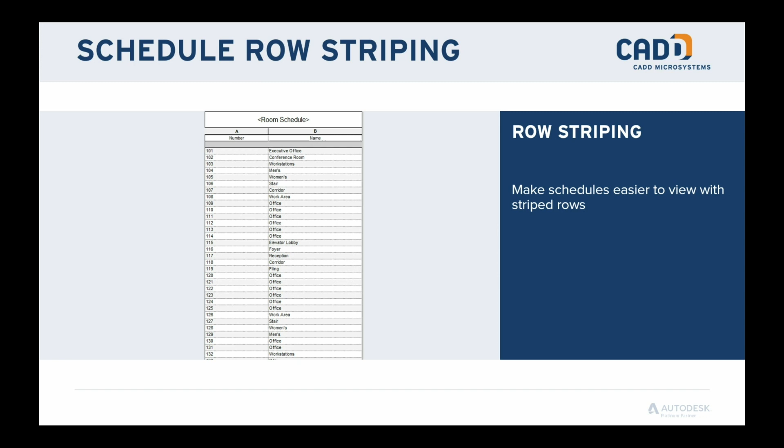But if anyone, yes? Sorry? Not that I know. Well, yes. No, actually, no, it doesn't. I'm sorry. No, it doesn't. I was thinking of printing it as a screenshot, definitely, but not putting it on the sheet. Yeah. So that's a good question. But as far as just visualizing the schedule, I think it helps a little bit, and it lets you know they're thinking about visualizing. This actually came from an idea from a Revit user, believe it or not. So they incorporated it. They said, why not?

All right. So now we're on to the MEP portion. This is the MEP analytical model updates, specifically for my mechanical guys. So has anyone ever worked with Revit Insight? No? Revit Insight is a way you can create an analytical model based on your Revit model. Then you can change around the design aspects, place equipment, and model it accordingly. But the problem was you were creating a redundant model. This is something separate from Revit.

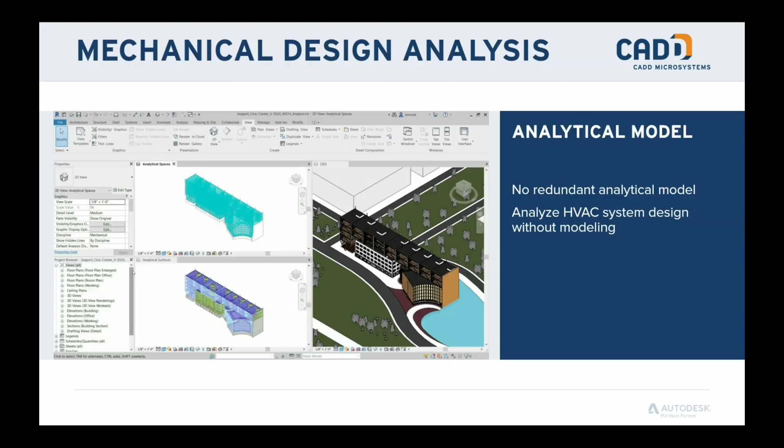Now what they did in 20.1 is give you that analytical capability inside Revit. So it's analytical modeling inside Revit, and there's no redundant analytical model. You can analyze HVAC system design without any sort of HVAC modeling. You don't have to put in a VAV. You don't have to put in ductwork. You just specify inside the room what you're looking for as far as equipment goes. Again, this removes the redundant analytical model you might be using right now and puts it into Revit. Also keep in mind this is actually done in the architectural model. Does anyone think they know why?

Because all your wall materials are in there. Okay, so all your wall materials, your space information, or room occupancy information is all in there as well. And it's also keeping track of any sort of climate changes as far as location goes. So it's taking that information and helping you build that analytical model.

So this is actually done in the architectural model, okay? So setup, architectural model, energy settings. You can go right through project settings and go right up to energy settings. Something that I've noticed here as well is that you want to say use building elements, okay? Use building elements. If you use conceptual masses, if there are no conceptual masses in there, well, it's not going to produce a model for you. So you could say use building elements.

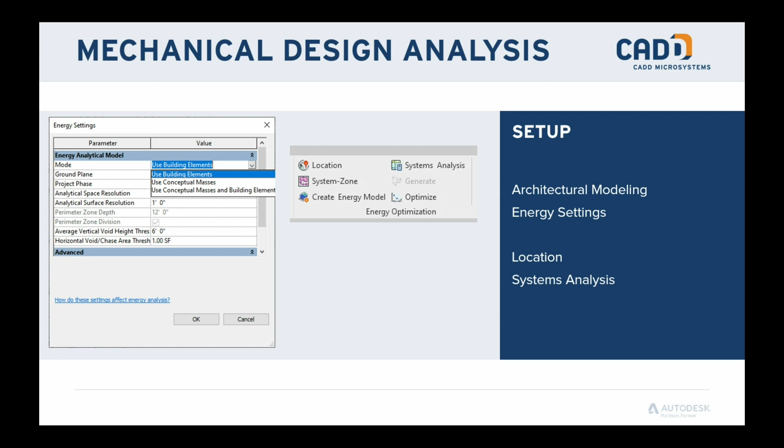You could say use both, but I've found that the best output that I've gotten was just actually using the modeling elements. So it's going to get the information from location, and also you'll find everything that you need to produce this analytical model up in the Systems Analysis tab. All right? So system creation.

So something to kind of understand here is that before you start producing your analytical model, you have to set up your systems. Okay, so you have to really just define what kind of systems you're going to be creating. So you can create an air system, a water loop system, zone equipment, and all this is done in the system browser. Okay, so when you open up the system browser, there's that little drop down. Just drop it down to analytical systems, and then you got those three tabs right there. So you can start creating your analytical settings right there.

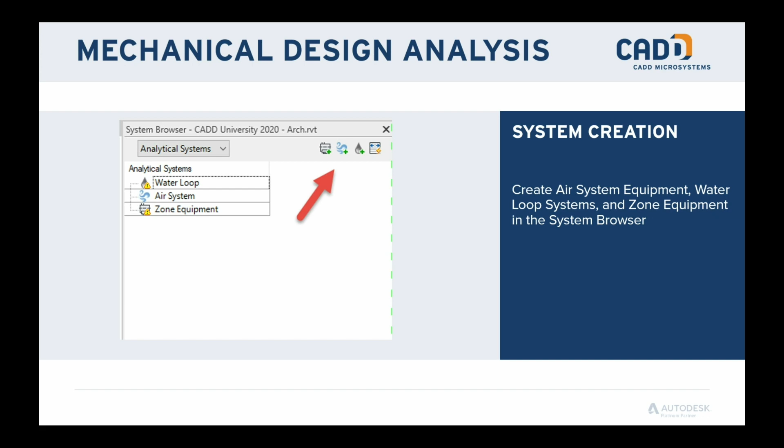Okay. Come on. There we go.

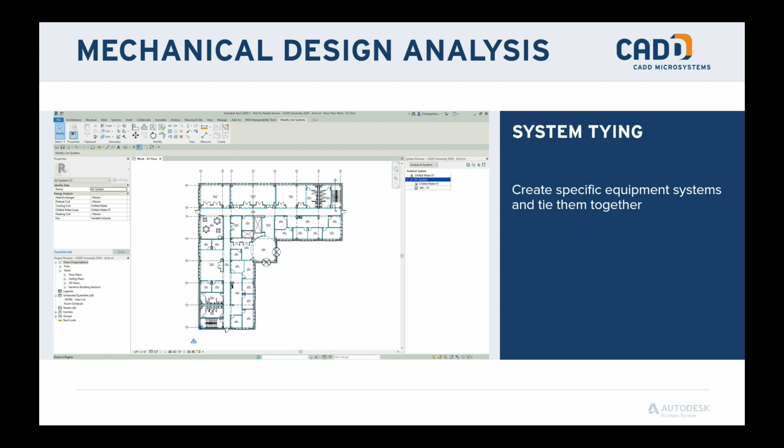System tying. So this is a little GIF just to show you that when you have your systems together, you can actually specify with your system equipment what other kind of equipment is it using. So I created a water loop. Well, now I can actually have my VAV unit use that water loop. Okay. Or I can say this particular zone equipment is using this VAV and this water system that I'm defining separately but bringing it together as a group. Okay? So you can tie these systems together inside the analytical model.

So when you have that done, then you can go ahead and start creating your system inside the model. So in this GIF, what I have is creating this system kind of layout. Really, you're just kind of drawing out a pathway of where your system is going to be taking place inside these offices, and I have it crossing through the workspace as well.

And then there, I'm defining the zone equipment, okay, the VAV, and since it's all tied in my Systems tab, that VAV, any systems that are connected to that VAV is part of that system as well. Okay, so anything that I tie to that VAV over there in my Systems tab gets tied to it as well. So you can create that analytical run, and you can create as many as you want inside that model.

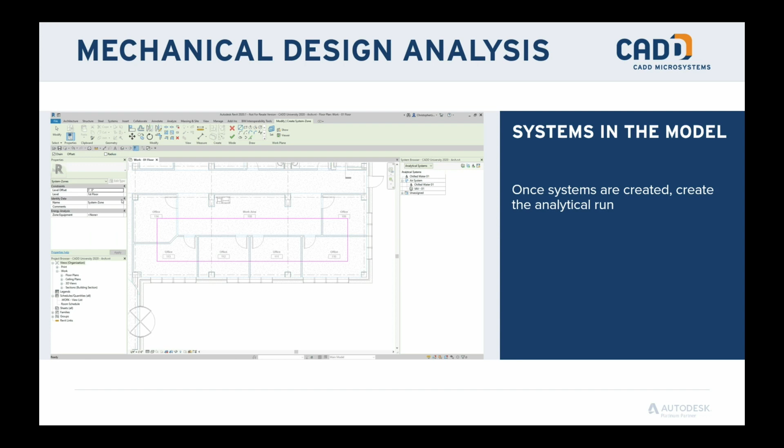Okay. So then once you have it, you can now create a 3D view and be able to analyze this in sort of a systems analysis view here. What you're seeing here in the 3D view. Okay. All right. And then finally, you can create, whoops, actually, let's go back here. You can start to create an analysis report. So what you actually can get is an analytical space report. So it's just a report that gets generated up over here in the project browser. It'll give you space information.

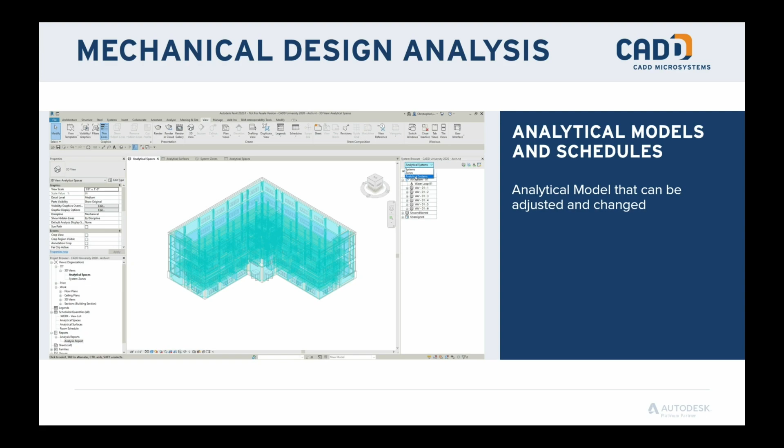Now, for right now, I haven't figured out a way to get it just to report what I have in the model. So say if I just do the first floor, just do the first floor. It's actually just doing the whole model, but still, it's actually a report that gets generated, and then you can continue to generate that report as you continue to build your system. So this is something to keep in mind, especially when you're going through your DDs, right? You can start to do this at the 30%, start thinking about it throughout the 60%, and then finally finalizing everything between 60, 90, or however you want to work, okay?

So just as a summary, there are some small little updates with Revit. Certainly, I think that one of the better ones is actually the striping of the schedules. And then, of course, being able to see my survey points and my project base point through links. I think that's just actually really, really fun to use, and it gives me a lot of really great information.

And then, of course, the MEP update. Now, that MEP update is probably one of the bigger ones that I've seen since probably 2015, 2014-ish. Okay, are there any questions? Yes.

That's a good question. So the question is, can the analytical model be used with the architectural model linked into the MEP, from the MEP? Unfortunately, not. So it needs to actually be in that architectural model. But keep in mind that you should hopefully have the architectural model. If not, if it's a BIM 360 model, maybe you can try to get that as a downloadable project file, separate file.

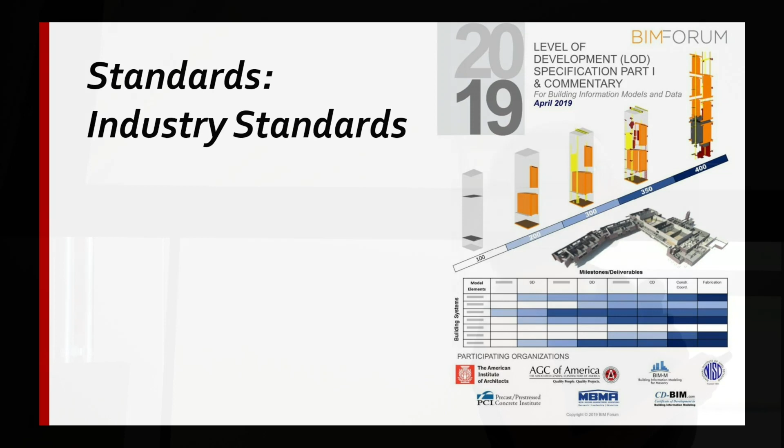We have other industry standards. Talk about overwhelming. Who has ever looked at the LOD specification? Okay. It's complicated. I think part of it on smaller projects can just be handled by discussions without going through the crazy spreadsheet. It is, however, similar to what I said about the Penn State thing, it gives definition. And whenever you're working with a group of people, it's always good to have a baseline definition so you're not wasting the time trying to come up with one on your own, and you all know what you're talking about.

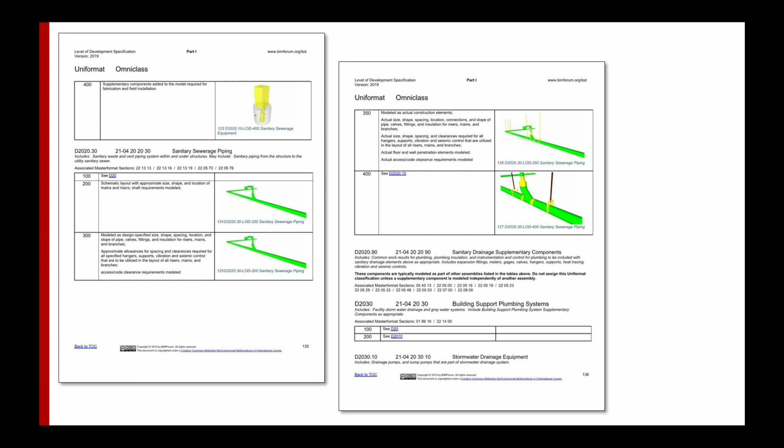Graphics, I think, help too in certain scenarios, but on my projects, I'm not going through every single element. We're, in most cases on smaller projects, making blanket statements of LOD 350. And if there is a need for more, we will address that. But for the most part, we're not getting into a 400. And this is talking from a construction side.

Other industry standards out there, the AIA contractual documents we have available. Anyone using these? Okay. Also, ConsensusDocs, more on the construction side. I've been introduced to this. So same thing, they do have some really good information on what you can include in a BIM execution plan. Thinking beyond just, I use it a lot just for coordination, but thinking about scheduling, estimating, other data that we can all collect from this model.

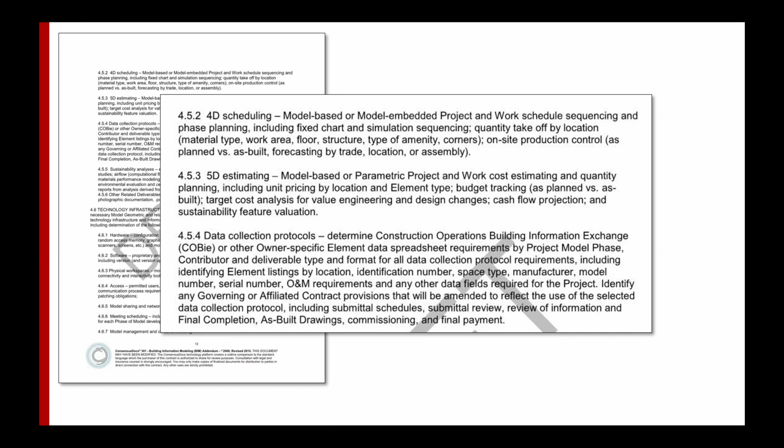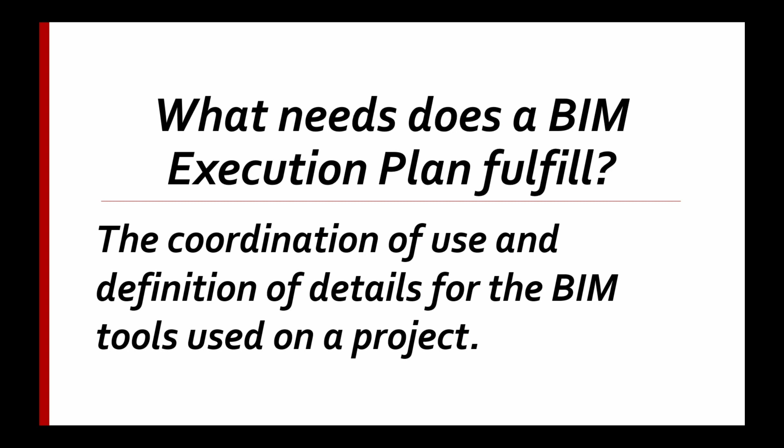Okay, so that's kind of the framework of where we're going with this, what I had in mind as we put together this session. So we're going to think about what needs a BIM execution plan should fulfill. To really get into the technical details of the BIM tools you're using on a project. That was the definition that we came up with. So one of the big things, obviously, is identifying those technical aspects. So in a lot of software we have today, thinking about licensing and access needs, we want to make sure we're addressing that in that plan, right? So everyone knows how we're working together, what software we're using.

Thinking about software update timing, like Chris said, you want to make sure everyone's always on the same version, same update, but thinking about how that's going to affect your project as it moves through. Because I've worked on projects before that have been stuck in an old version of Revit because people were too afraid to move forward. And then 4 years later, you're like, why am I still using these really old tools when I have much better ones available? There's only been once or twice where I actually did have some technical issues with upgrading, but for the most part, not.

So here's an example. Who in here is using BIM 360 Docs? Anyone? Okay. So when you're thinking about access control, it's a great feature in terms of being able to control who has access to what, but it's still that extra step of making sure that everyone has the right permission to what they need. So just make sure you define this in your plan. Are you using this? We go through and we list, this is where we will store this, this, and this, so that everyone knows what they have access to, what they need to request access to, and what we're planning.

Thinking about how we're sharing everything. Model sharing is another big topic. I was talking earlier with a few folks. So thinking about what tools you're using throughout the project. There's going to be different ones, right? You might be starting with SketchUp. You might then be using Revit, and then maybe Revizto, Navisworks, bringing in AutoCAD, bringing in all sorts of stuff. So really defining how all that sharing is going to work is really important. The BIM execution plan should address that.

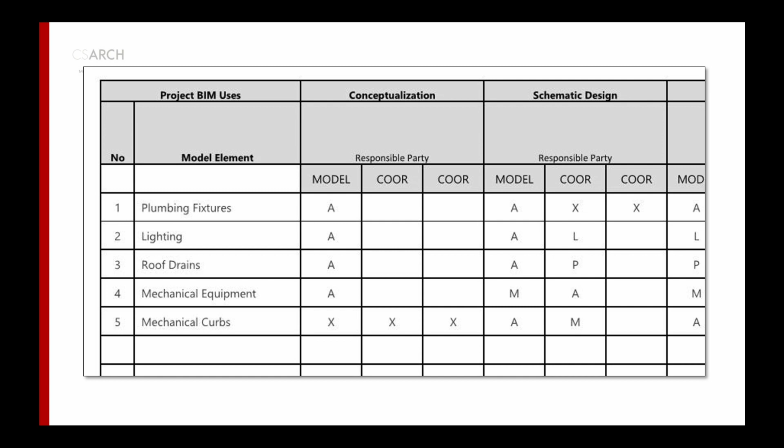So here's an example from CSArch looking at how different model elements are being carried through the project and who's responsible at what time. In this case, I use the plumbing example. So during conceptual design, almost everything is being done by the architect, but then as you move forward through schematics, design development, and into construction documents, it's going to change.

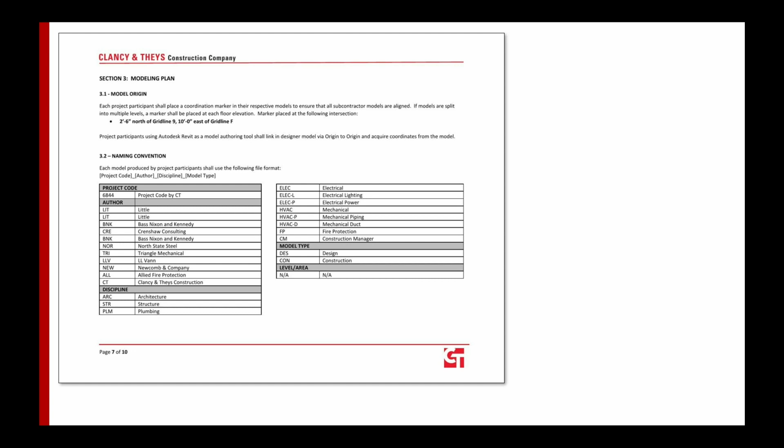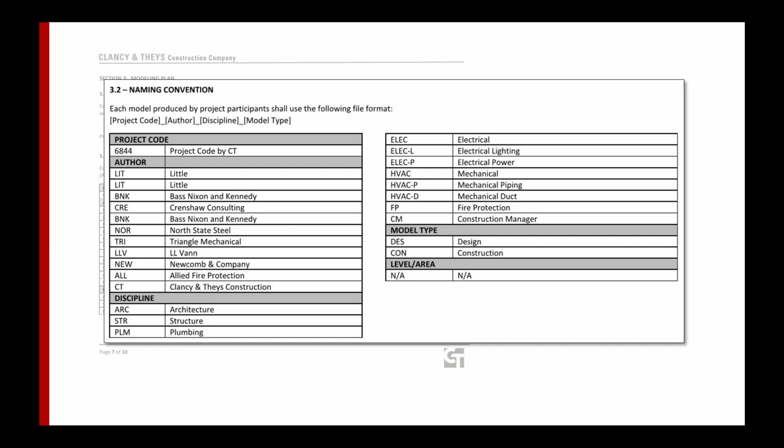Here's an example from our current BIM execution plan, thinking about naming conventions. So really getting down so that everyone uses the same, and then it just really makes it easier, like I said, as we're updating, and also just to understand what you're actually looking at. Or if you're looking at a browser in Navisworks, knowing which model is which really easily. So that's what a BIM execution plan should address.

Too often, and really the genesis of this session was, at BILT 2018, I did a panel discussion on coordination between disciplines. We had one small portion where we were talking about BIM execution plans, and there was one attendee who had lots of questions, and he would not stop talking about BIM execution plans. Because he realized, as I knew, that they're so hard to use. How often, if you have used a BIM execution plan, have you filled it out in a meeting and stuck it in a drawer and no one ever looked at it again?

And I think part of that is because we include information in there that shouldn't be in there. So that's really how this whole idea of this presentation started: we knew that BIM execution plans aren't really what they should be. So what should it not fulfill? It's really anything related to the overall project management. Many times there are overlaps, and then the document gets outdated when it really shouldn't, and no one ever references it again. That's what we want to avoid.

So looking at different project roles, contact information. How many times have you updated contact information for someone, and then you have to do it in like 5 different places, and it never really gets to the right spot? So really being smart about where you're putting all that information before it gets outdated.

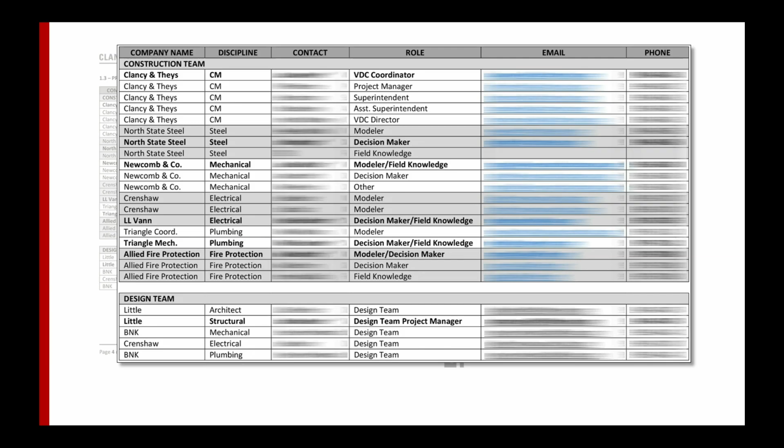So here's an example of a contact sheet. And like I said, we're making sure that during coordination we have a modeler, we have a decision maker, and someone with field knowledge involved at every step, to make sure that we're getting really accurate coordination models that can be built in the field.

Another overlap that gets put into BIM execution plans that really shouldn't fit there is thinking a lot about deliverables. So we want to make sure that we're really looking at the modeling scope with our project scope, making sure we're hitting all those targets. And thinking about how the model will be used at the end. Do we have owner requirements?

We're working with a school system that has in our contract, not the designer's contract with the owner, but the contractor's contract with the owner, a requirement to provide an as-built model, and that's all it says. So, just trying to get out of them, what do they envision using with this model? What model do they want? We end up giving them all the native design files in an NWD file.

What do they do with it? Do they do anything with it? What do they want to do with it? What do they think they can do with it? So really starting those discussions is more of a broader project, doesn't really hit those really technical aspects we talked about at first. So you're really trying to identify how someone is going to use the model. If you're a designer thinking about how a contractor might use the model, that's another way too.

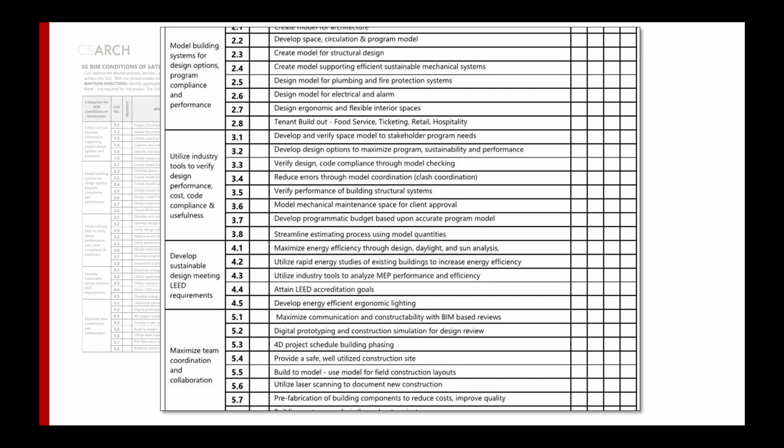Here was another spreadsheet. So my co-presenter Volker said this got a little complicated. They provided it so that a project manager could ideally come through here and check boxes as to what they thought they wanted to do on a project. But it got too complicated and everyone said, well, we already kind of know what we're doing, so we're just going to ignore that. So really trying to address things like this that shouldn't be in that BIM execution plan. It's a broader project goal.

So before I move into how we can tie aspects of the BIM plan into a project plan, since there were a lot of BIM execution plan newbies out here, anyone have any questions about BIM execution plans in general? Do you find it something that you have to come back and revisit throughout the project, or is the goal to have one discussion, one plan, and then very few edits and revisions through the project? So the question is, is it something that's done once, or are you revisiting it, right?

I think ideally, and I'll actually hit on that later, it should be revisited. What happens too often is it's filled out once, and then everyone says, okay, now we kind of know what we're doing, but then it's never enforced, and no one ever really goes back to it. Try to think about ways where you have to force people to go back to it, whether it's even as simple as including in meeting agendas that we're looking at this part of it, or have something that you have to fill out at a certain time.

That way people reference it, because that BIM execution plan, we gave the definition of it as identifying the technical aspects. It's really also trying to identify a level of expectation so everyone knows what they're responsible for. So that if you're working on a design team, like I think most of you in here are, you understand what to expect from your consultant, or working as a consultant, you know what your architect is expecting from you. So really setting that level of expectation. So being able to go back to that, I think, helps people understand this process better.

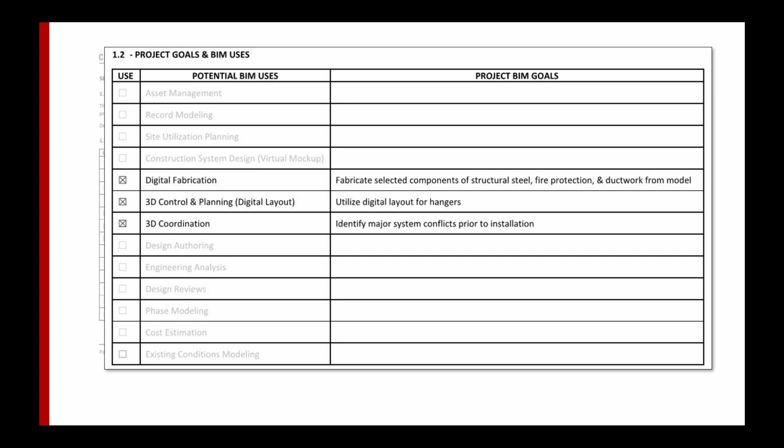Here's a bad example. This is an old BIM execution plan that I'd done where we had this section for model analysis that everyone just said, I don't know if we're doing any analysis, so no one ever filled out this page. It might as well not have even been in there. It was just way too vague. It didn't address specific project needs.

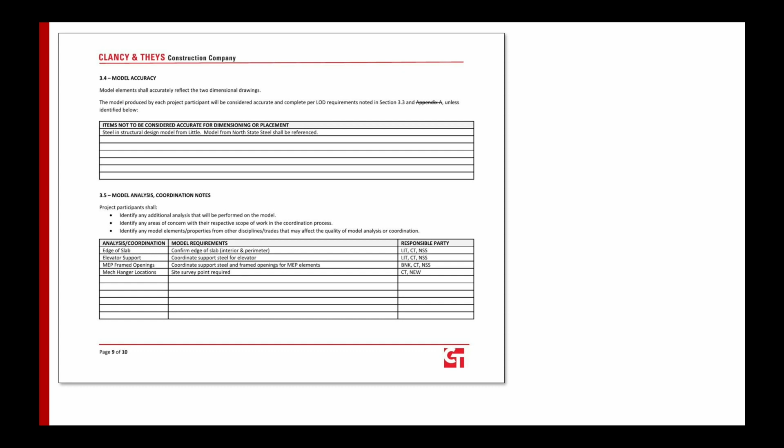So here's another example from our current one where I kind of took that a step further, and this also just requires part of the whole: you can put together a great BIM execution plan, but if you don't actually talk to people and communicate well, it doesn't really go anywhere. So in this case, we sat down at the beginning of the project with our subcontractors and said, okay, what additional coordination notes do you want us to include in here? So we came up with edge of slab, elevator support, MEP framed openings, and hanger locations, and we actually identified who was responsible.

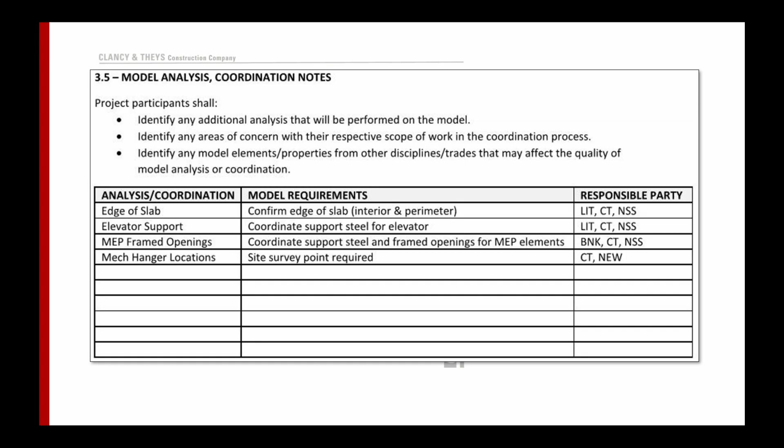I don't want to say we followed through 100%, but the intent was there. So that's another thing I'm looking forward to. And the next part of this is also, I don't have all the answers, just thinking about what we can do better. And just finding a way to kind of follow up on this as we move through. Some of these items we hit, some we didn't.

So, I said the maintenance of the document. I'm still trying to think about ways that we can add kind of milestones in there that require you to go back to it so that people actually use it, and really incorporating it into your overall workflow. So it's not just one meeting and then everyone forgets. I think also when I mentioned before about including the whole project team, that helps too. Really thinking about how different people can use this document and not just the BIM manager and the modelers.

So thinking about all the different spots, we can help our estimating team when they're doing cost estimating. Obviously, we're helping out project managers with coordination, but then beyond that, we're doing drone overlays for field verification. We're dabbling a little bit in laser scanning for verification. So how do all those different items that are BIM related but still fit into the broader project plan, how do we incorporate that?

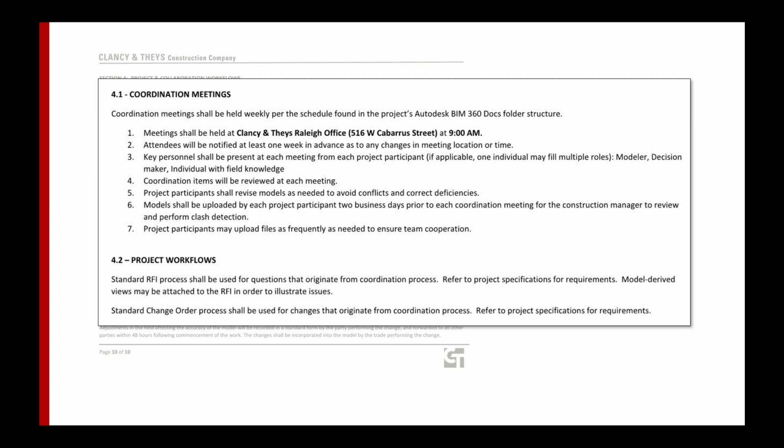So when we revamped it, we went ahead and made it really simple. Bulleted points, meetings are going to be here at this time. We don't specify dates, getting back to not having overlap of information, having that somewhere else, and then just really basics, done. Much easier to understand.

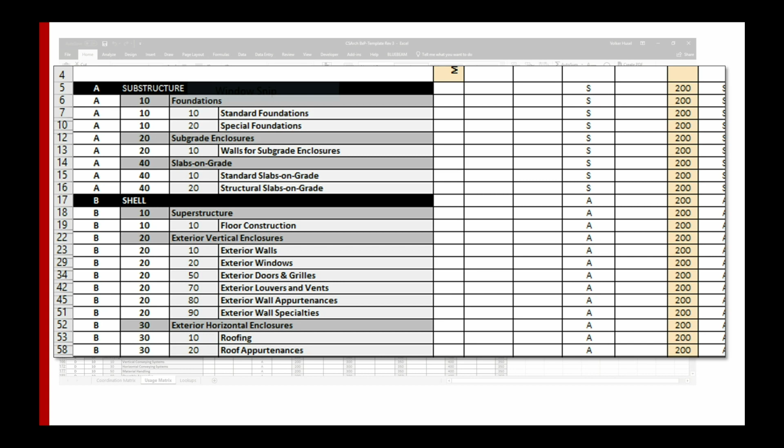So here's an example of the LOD spreadsheet. Going through all these, I'm not going to say this does not apply to some projects, but for most projects that I work on, this is way too much. So how can we better address all these needs that we talk about?

Also expanding users' understanding of BIM, that it's not just Revit, right? It's all this other stuff that goes into it. It's the process of how we're sharing information. There's a lot that's included.

Incorporating programming, so really getting started early on in a project and really thinking about how you can use it throughout. And then all the way down to facility management. You know, I talk a lot about that I think there's still a software piece missing to get from the end to the owner, but just thinking about the potential, how might your model be used someday, even if it's not going to be today.

And then my goals I'm looking at in this BIM execution plan, same thing. How do I address needs of my project managers? Because they're the ones running the project. How do I make sure I get them on board? Because it's going to work so much better if we've got everyone involved. And then same thing, looking at pre-construction, but also looking at collaboration with designers.